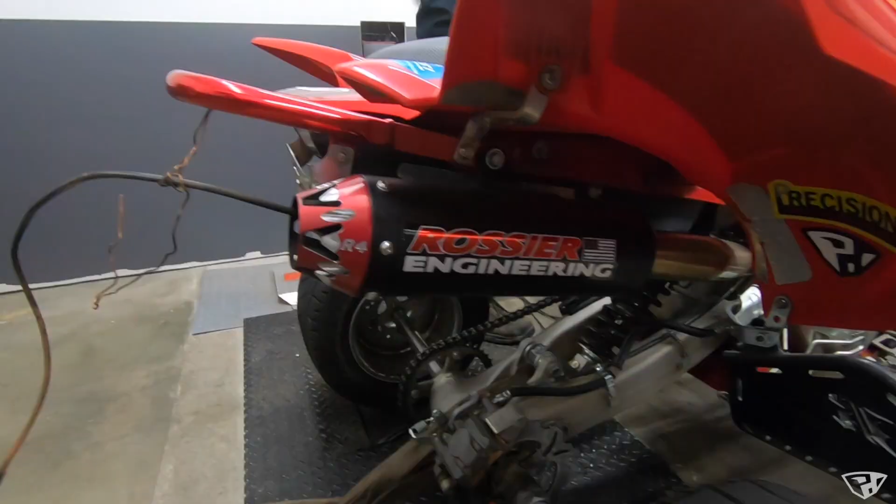All right, so we are in the dyno room here with Jay, and he's going to do some test runs of the Raptor for us. I officially have no idea what the numbers are that this thing's putting out, but everybody's pretty excited, and I guess we'll find out. All right, so this is your file right here.

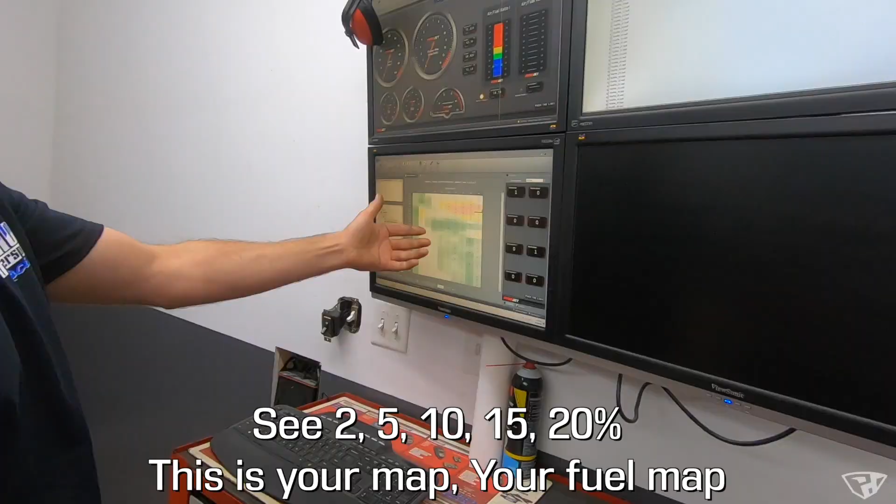I made 104 passes on the thing. Holy cow. Now, a lot of it's part throttle tuning. There's not many full throttle tunes because you don't need to. I concentrate a lot of my efforts on the bottom. The full throttle is nice and it's good, but here's the thing, we need to make 7-8 passes before it even proves it gets a number. When I was breaking it in, I started with all the low stuff. There's your 2% throttle, I'm talking like the columns here, see 2, 5, 10, 15, 20. This is your map, your fuel map. And then what do these make? These are around 45 stock? These are 45 stock, but it's like a terrible 45, like you hit 45 and you're done. There's no carry in the power.

We replaced every bearing inside the motor, every seal. All of them, we don't take chances. It's a lot of attention to detail, but it could go a long ways for the longevity of the motor. I didn't expect you would do it to that extent. This whole thing has been completely done. We treat every motor around here like it's a pro motor, from start to finish. So what was all done - I mean, you said you changed every bearing and seal in there.

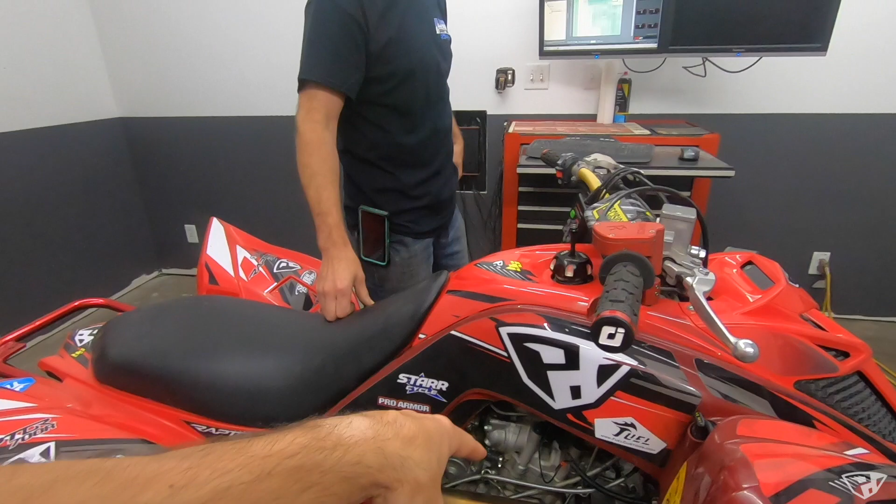Right, and then there's aftermarket parts in the top of the motor now too. So basically what you have now, besides your FCI intake with the box, Rossier pipe, and power commander, is your big three. Now you've got the Vertex 10-to-1 piston, pump gas, ported the head with our CNC port, did the drag port, did the +2 valves, which won't really help you now, but you're going to grow into it with our plans that we're talking. So when you go with the 734, or whichever size motor you go with, this head will handle that, so we don't have to re-port the head in the future.

Bore throttle - it's got the stock throttle body. If you have a bore throttle body, the head will support that, no problem. Oh, there is a cam in there too now, yeah. We won't touch it until it's time to do that level of work though. Right, so what we normally do is when a build comes in like this, to keep it economical as possible, if the cylinder looks good yet, we'll keep it a stock bore. If the cylinder plating's worn off, like we've seen many times because of not so ample air filter maintenance, then it's time to do the 105.5 mil bores where we take them to on the stock cylinder, and that puts it to a 734 motor. Wow, and then if you really graduate, you move up to?

Well, then that gets expensive when you go in the bottom. Then you do a custom stroke crank - if you put a crank in, you might as well put a big crank in. Yeah, that's crazy. Yeah, we'll cross that bridge when we get there. This is already crazy exciting.

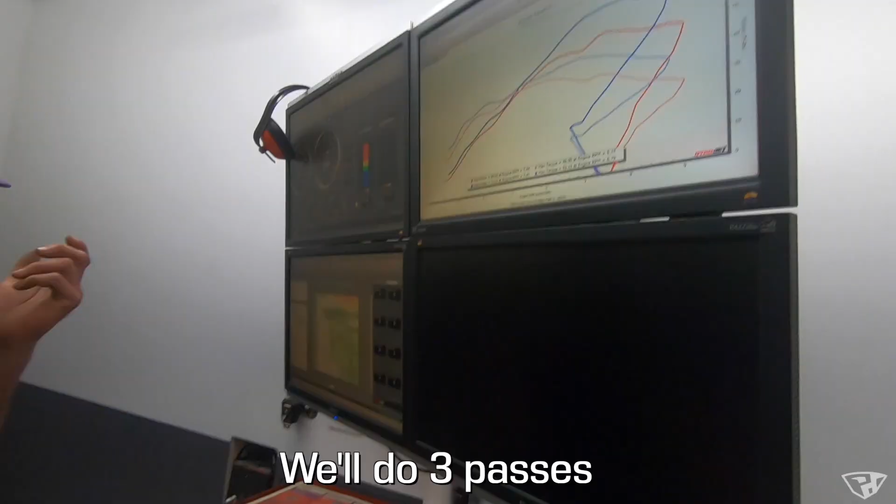Yeah, let's fire it up. We're gonna fire it up here. We'll do 3 passes. So it's going to make probably, on a cold motor, probably 53 horse, 56, 7, somewhere in there. Cool, let's see this thing.

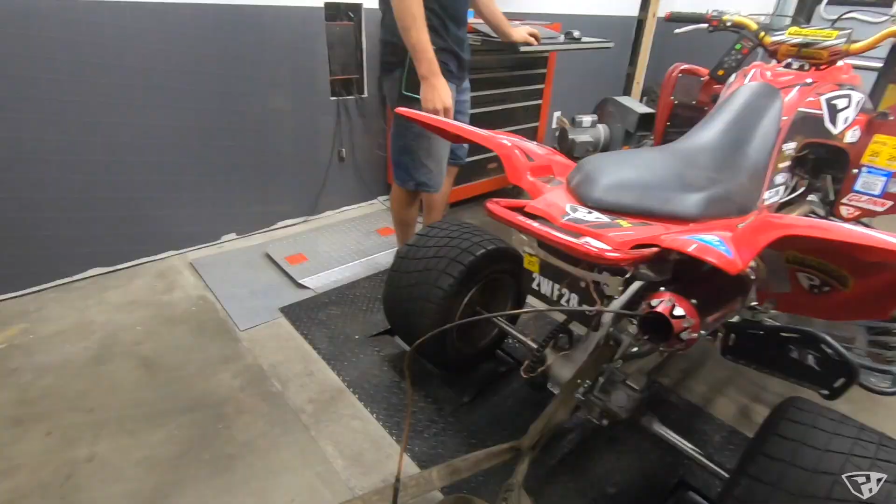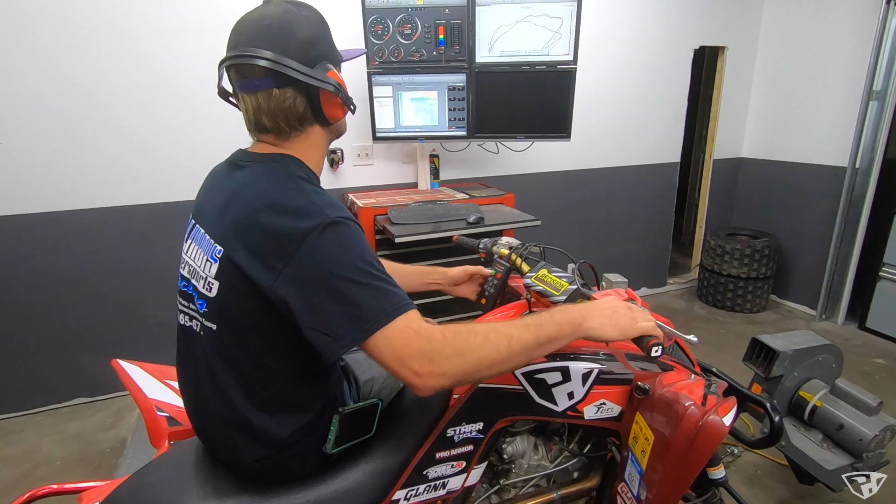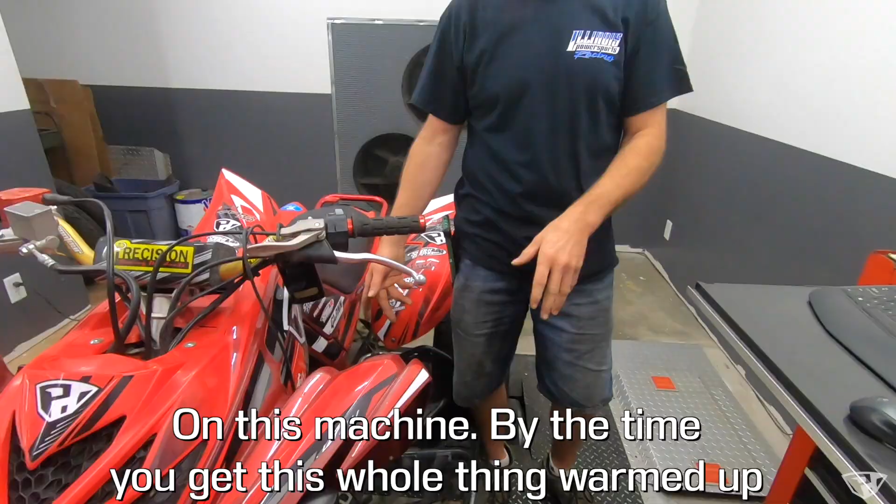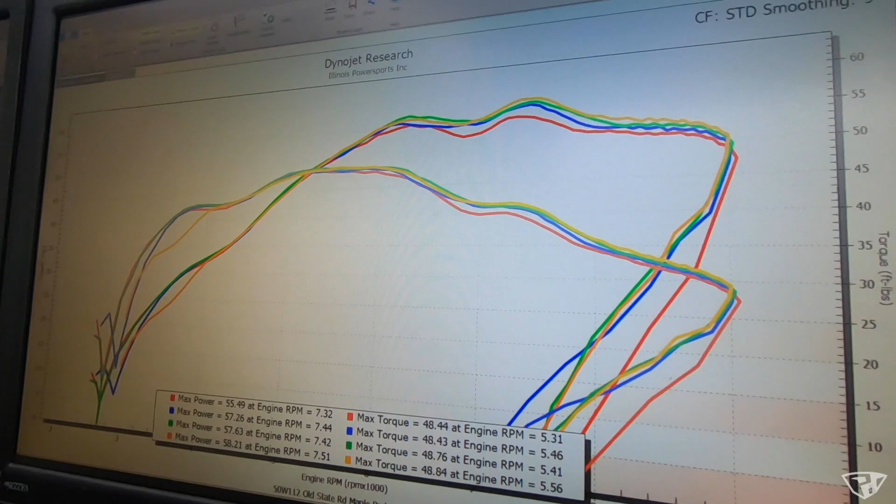Yeah, it is. It's spot on. That is so great. Wow, I can't believe how much more is on the top end of it. The rear is just warm, so that means there's coolant flowing and the thermostat's opening, but nothing's all warmed up. Yeah, so that'll make a big difference when it is.

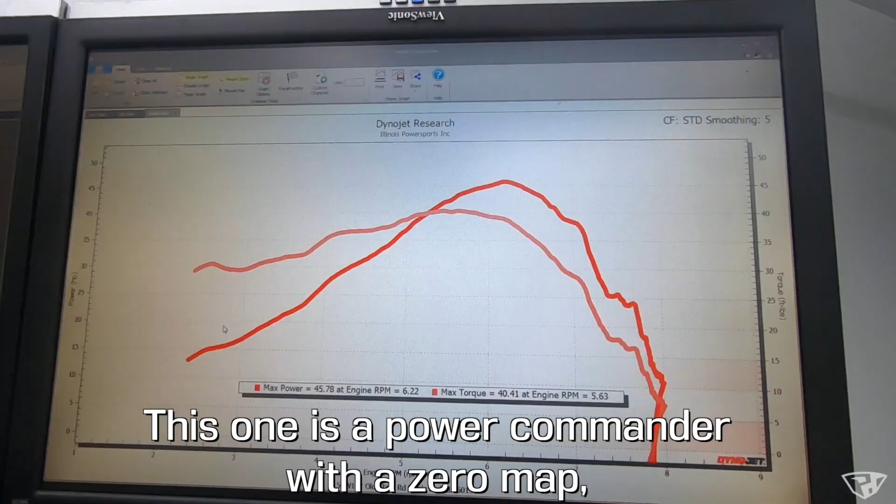Example of a stock Raptor. This isn't even completely stock. This one has a power commander with a 0 map, spark arrestor removed out of the muffler, pump gas, airbox lid on, uni filter in it, which is basically a stock replacement. So there's a bone stock motor.

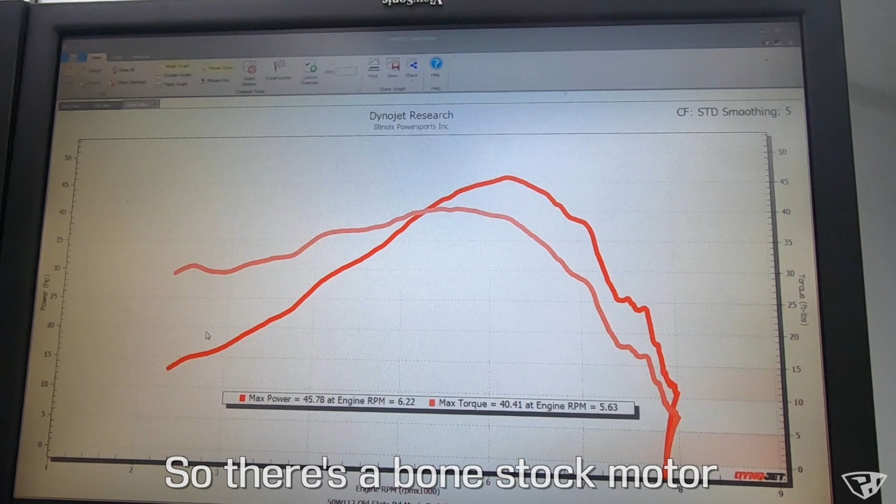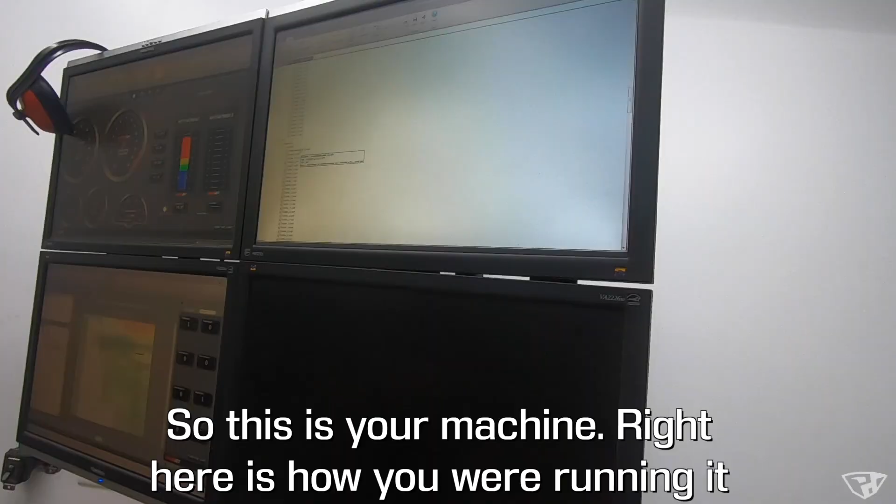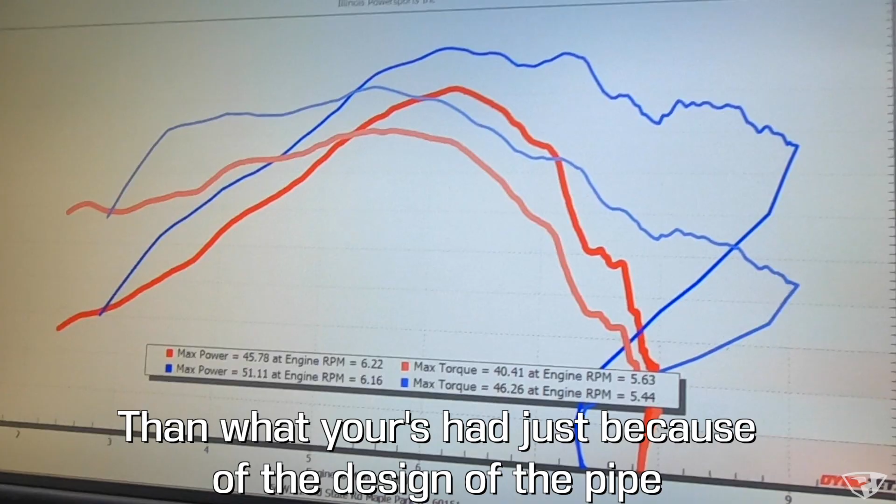So when you do your big 3 now, okay, this has a monster exhaust, power commander, FCI intake with box, pump gas. So this is your machine right here, how you were running it. That's pretty much what you had. It was the same setup, but with a Monster Might pipe, which actually has a little more top end power than what yours had, just because of the design of the pipe. Nothing wrong with the designs, just a difference between how they're bent and everything.

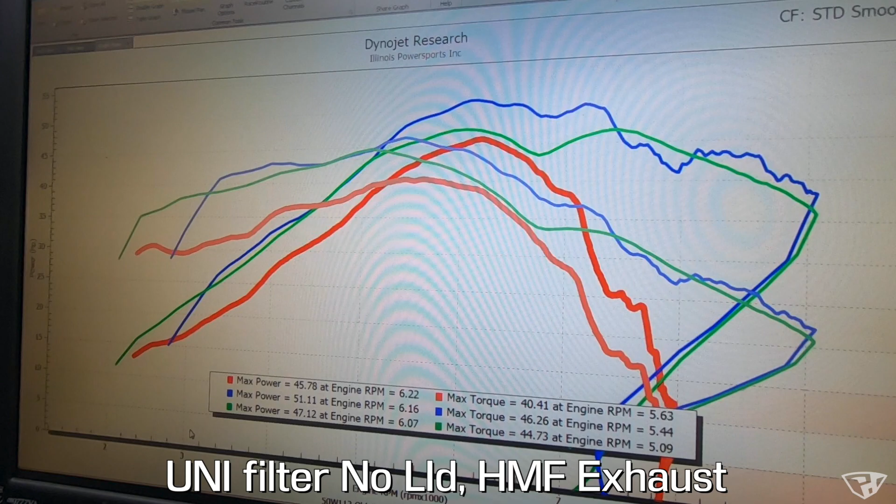So this green line is just a power commander box tune, uni filter, no lid, HMF exhaust. Red is stock, blue would kind of be your top shelf big 3, and green would be kind of your more budget big 3.

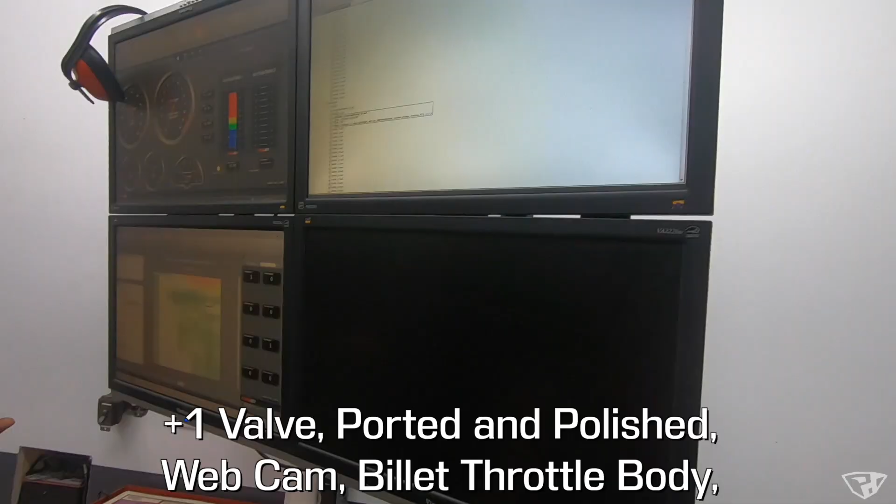Right. One more build I'll show you before I show you yours. It was this guy here. He brought in a pump gas, +1 valve, ported and polished head, Web Cam, billet throttle body, monster exhaust, FCI intake, power commander 5, with 11-to-1 compression.

So this was his best run, is the yellow. Oh wow, look at the top of that. Holy cow, yeah, look at the top of that. There's no over-rev, it signed off hard and it was done.

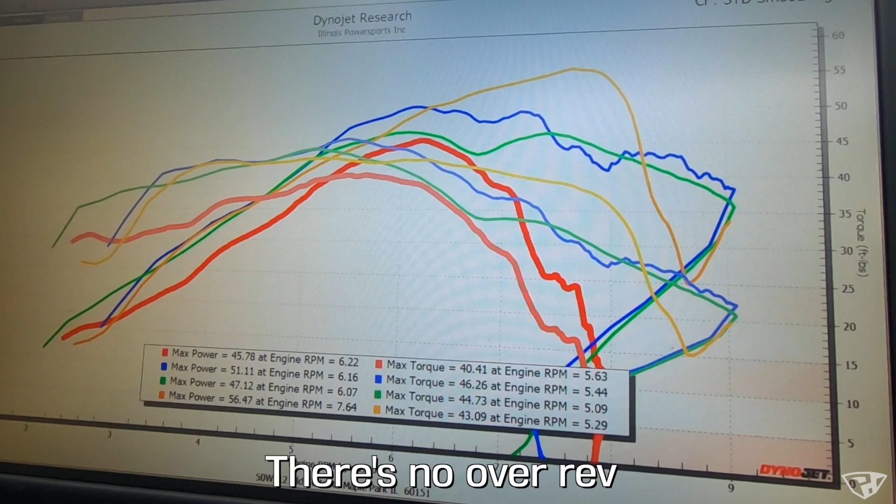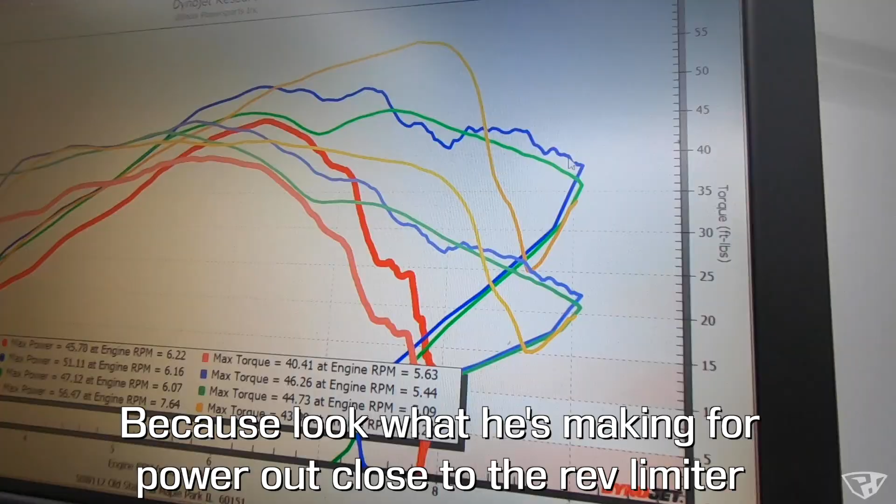The torque stays relatively the same with these mods down low, but you gotta have the thing run clean out to here, because look what he's making for power out close to the rev limiter. Exactly, and those other motors are falling off hard. So that was a 56 horse motor.

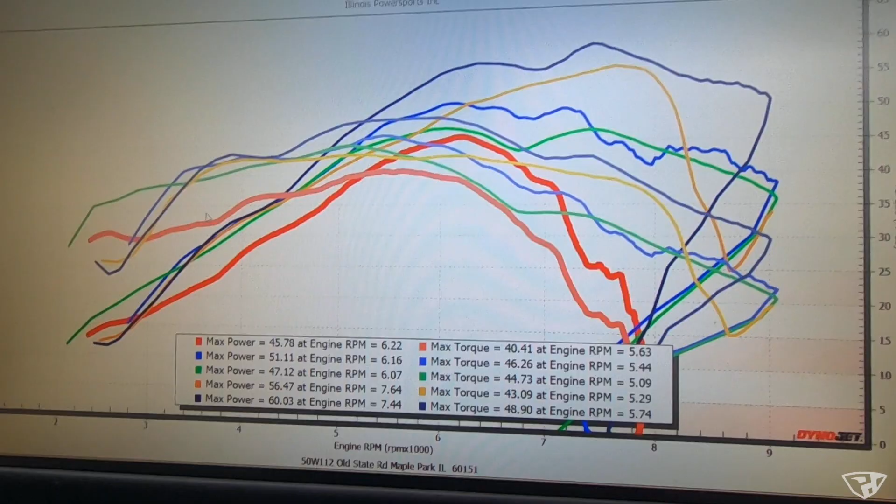Your motor, it's gonna be more than that. That's insane, I don't know if I'm old enough for this. Am I? Your motor, holy cow. Wow, all the front side of the other builds with all the... yeah, it's definitely above all of them.

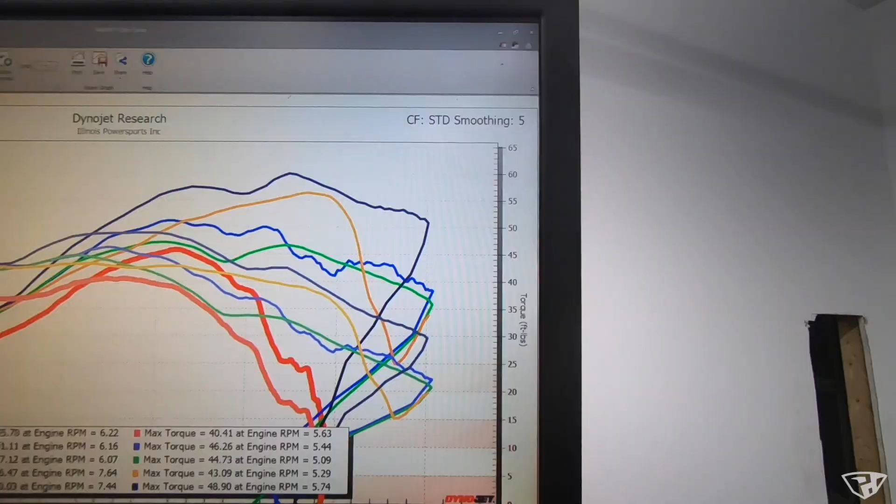I mean, these are big 3 machines right here. Yes, that is crazy how much higher that is, with no loss on the bottom end. At 9,000 RPM, you're a full 10 to 12 horsepower above all those other motors.

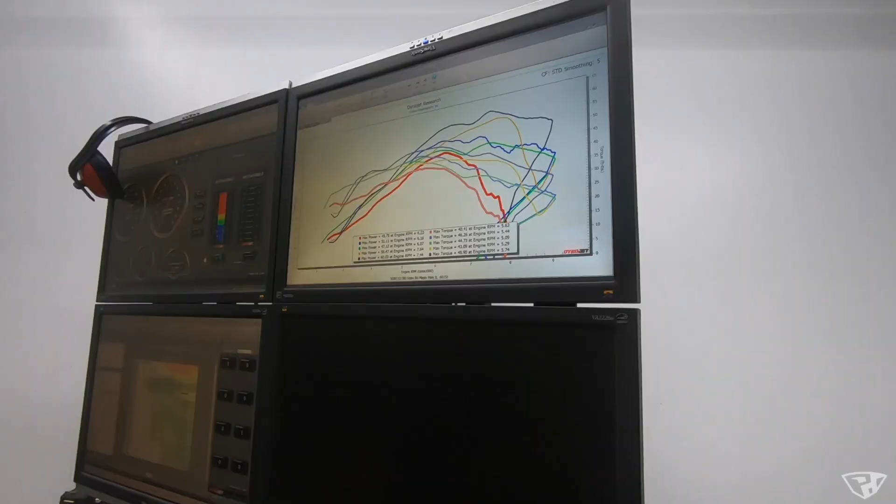This thing needs handling work ASAP, or I'm gonna hurt myself. That's crazy. I love all the overlays, this is really cool to see.

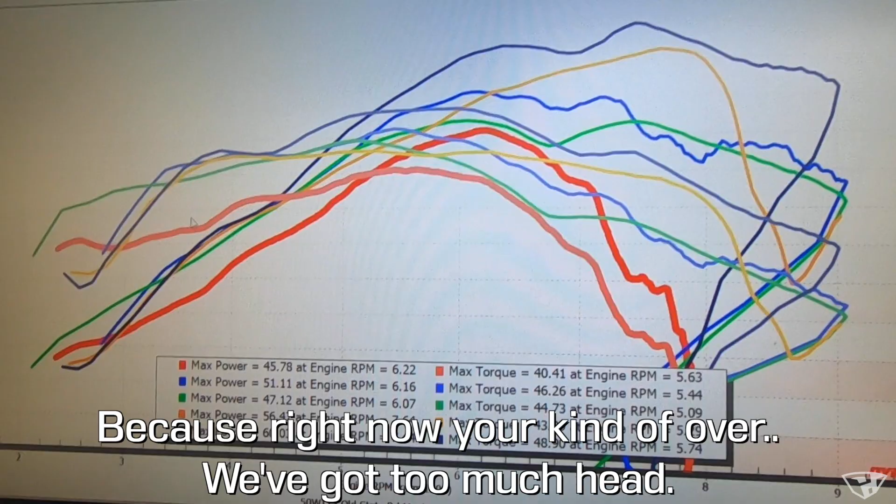Once you do your other mods, it'll start making a little cleaner curve rather than this little bit of a wavy line, because right now we've got too much head, is what we're saying, in your machine. On purpose, not because we felt like making the head big. But you'll grow into your other mods now, it'll make the line look even better.

This is what you would grow into. This machine is a pump gas build, but he's running only premium. I couldn't take a chance on you running maybe a little less than premium, so I kept it 10-to-1. This is 10 3/4-to-1. It's got the same head plus 2 valves, FCI intake, no box, and that doesn't matter though. Same cam, but it has a Dasa duals on it because it's one of the last years for the dual port. And the same spark plug, same power commander, and tuning it.

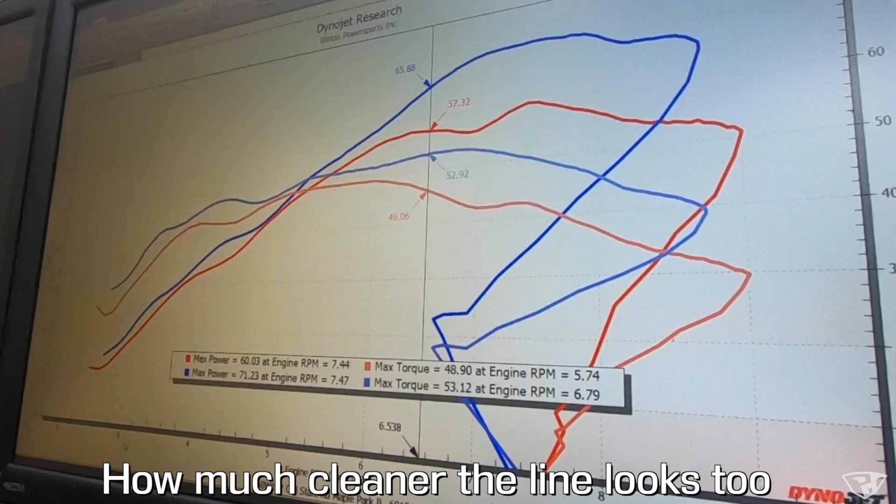And this is no throttle body though, this is stock throttle body. So see, when you start growing into the mods, how much cleaner the line looks too. So the 10 3/4-to-1 is worth about 6 horsepower right off the bat. Wow. In my opinion, 5 to 7 horse.

Yeah, you are right. Once you open the can of worms, where do you stop? It never stops, exactly. And how high is up? That's what we gotta ask ourselves.

I'm going to chime in as the third party on this. This dyno was bought from the rep of DynoJet, his personal dyno. I've actually dynoed dynos myself, taken mine to Lane at Driveline Performance, and I've flown my motor to Matt Shear to dyno his dyno, to triangulate these dynos and find out how accurate they are. We were all within like a quarter horsepower. On a 100 horse Banshee motor, we're within a quarter horsepower. That's pretty cool to see the accuracy between them all, so that's really good for everybody to validate themselves that way.

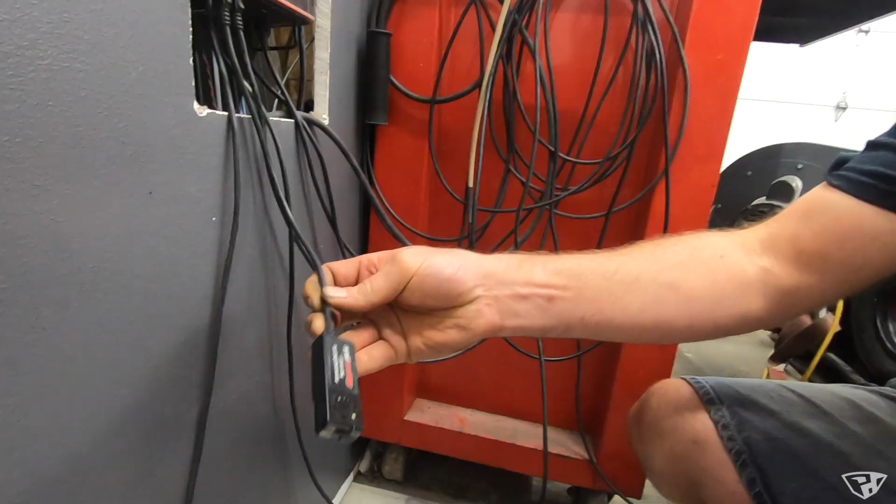You'll notice where his stack is for his computers, next to your machine. If I mount that stack here, or stick it on a shelf in the corner, and you make a bunch of passes and the room fills up with carbon monoxide and warmth, this thing is going to read a different atmosphere. So when it adjusts, your dyno's adjusting for elevation, it's adjusting for air conditions. That's the atmospheric module hanging down, it's got a little fan inside. That's taking the ambient temperature and everything in the air.

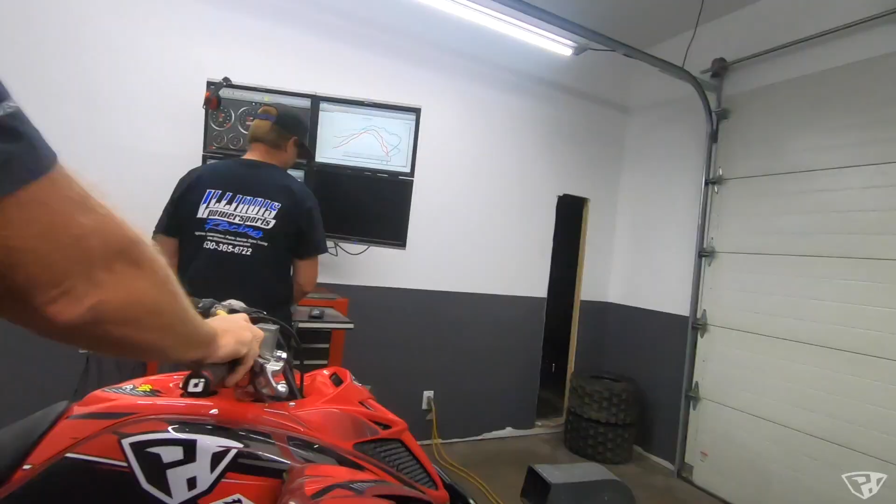Another thing that people run into is they go in and program their dyno. You don't want to tweak stuff, but guys can say the wheel weighs more than it does. So that's why the final numbers in almost all cases are taken with a grain of salt. Ideally, you want somebody to come in and make a pass with what they have, then see the before and after, and see the difference, because that's all that's accurate.

So I don't know, do you want any other video before we take it off? No, this is more than enough. Thank you for doing all this. That's fine, this was so cool to see it on here. It's definitely the real deal as far as your setup.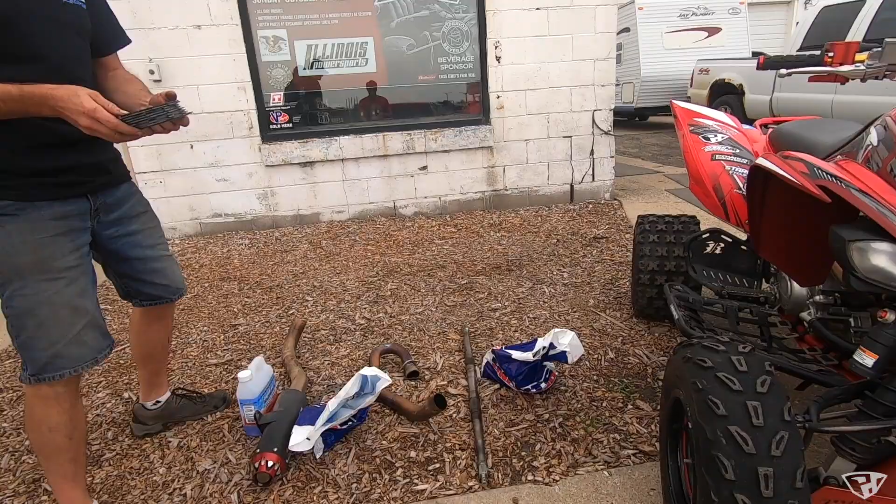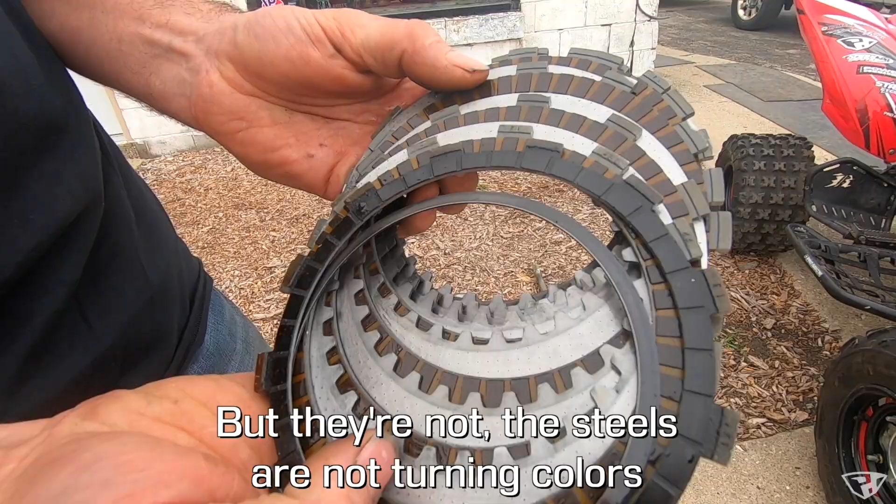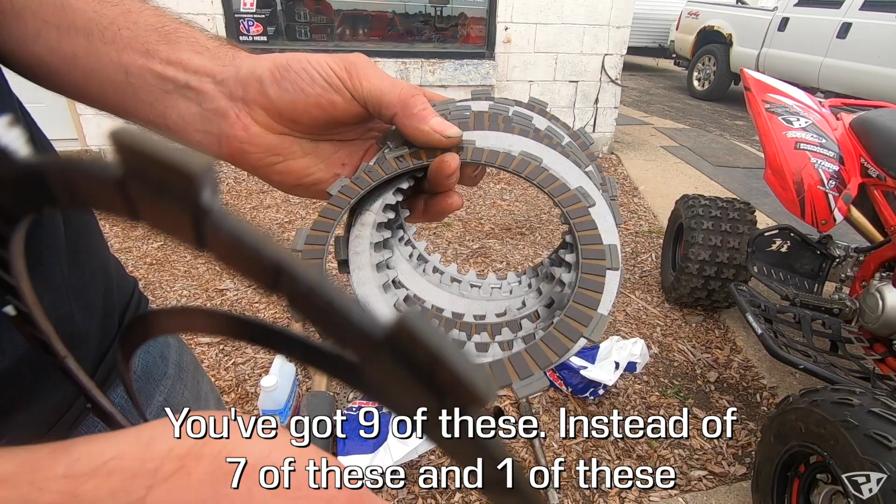So you've got the old clutch right here? Yeah, here's the first plate with the judder spring. Wow, yours is baked. The other stuff is not bad, they're getting a little dark, but the steels aren't turning colors. So it's not to that point, because this thing will smoke itself out beforehand. So now this is gone, you've got 9 of these instead of 7 of these and 1 of these. That's the difference, awesome.

So as far as longevity goes, what do you think we could expect out of your clutch? I'm still going to ride it the same way, and I'm going to say my clutch should look as good as these do in this amount of time, because this is out of the equation. That just seems like it's super poorly designed. I mean, I don't think I do a bad job running the machine. It's nothing you did, but there are people who think that's the case, like they did a bad job and fried that. No, this will happen whether your hand was on the clutch or somebody else. That's really good to know, thanks for explaining that, and it's really cool that it's upgraded now.

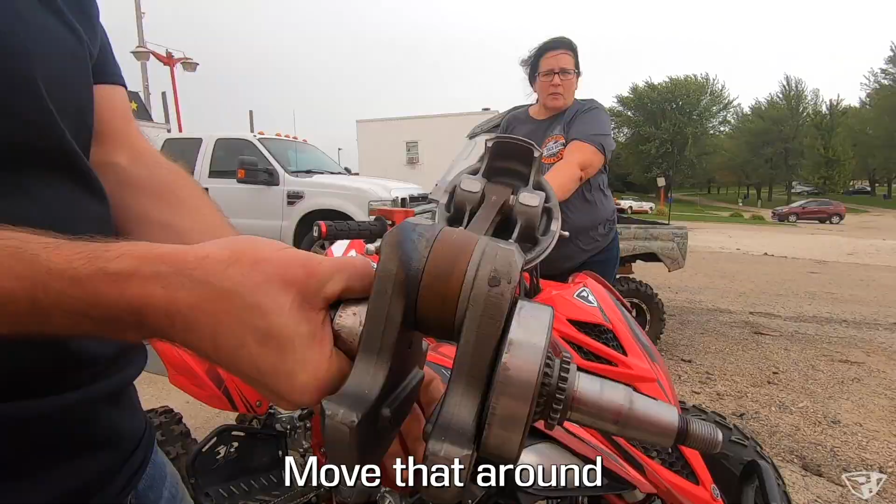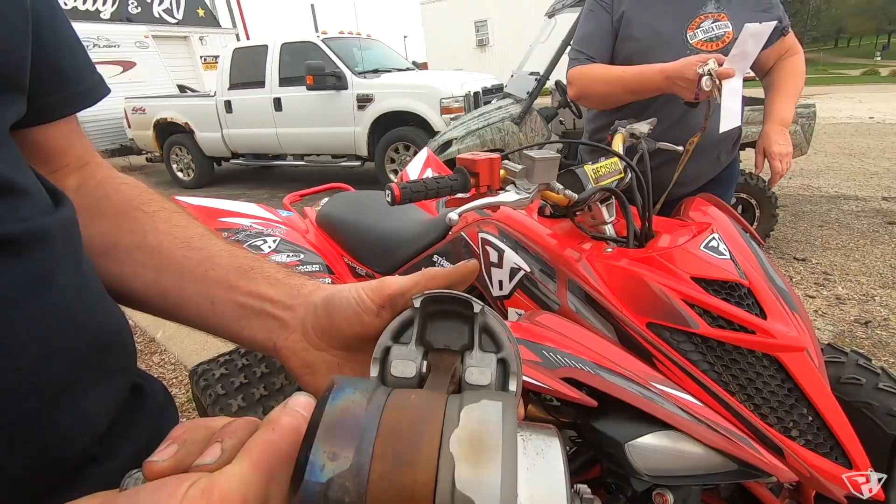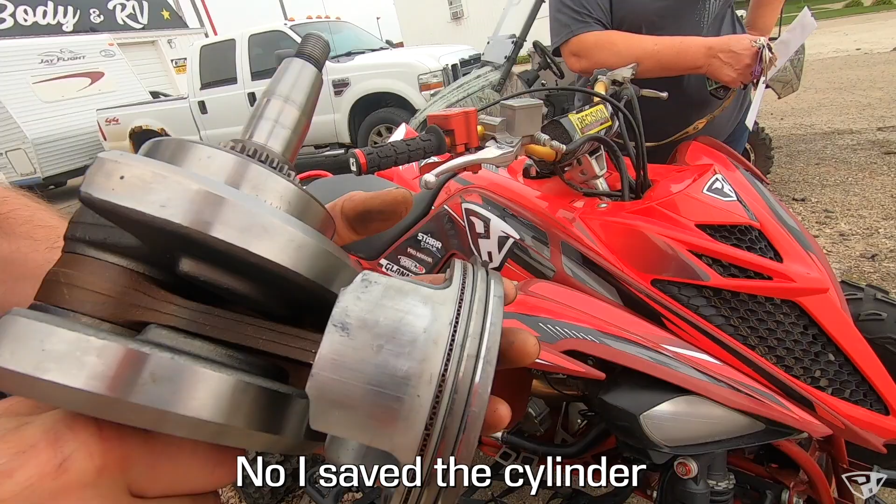Move that around, oh it's so gritty, holy crap. People will say that's not hot, that's just when they heat it to put the crank together from the factory. And see how it took out the piston too, because it wants to throw it forward on the scored cylinder. Did it take out the cylinder too? No, I saved the cylinder. Oh, same cylinder. Cool, that means he shut it off in time. It shut itself off in time.

All right, it's a lot later in the day here. It looks super good to have the Raptor back, I'm super excited to ride it for the first time. Jay did a killer job, I'm actually kind of in shock at how much was done. He was just breaking down his build process, and the attention to detail is beyond my expectations. I couldn't have even fathomed how much work he did. Nothing gets touched without a torque wrench, that's pretty much his motto. This thing is going to be a total ripper, super reliable, and he made it happen. I more than recommend Illinois Powersports. Let's go make our 6-hour drive home.